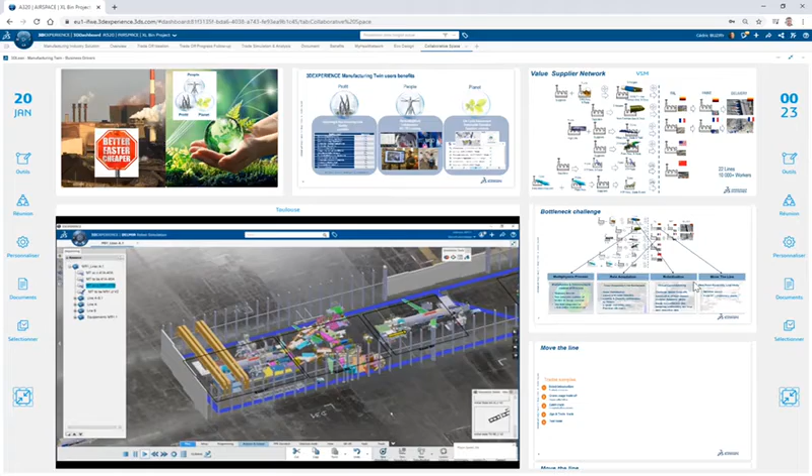Few words about the context. Our discussion with Airbus started 2 years ago when we decided to showcase a new business approach based on outcome delivery. And we started evaluating with them some concrete business challenges that they were facing on their production system. They gave us 4 topics to study.

The multi-physics test in the context of the manufacturing process, the rate adaptation of a final assembly line, the way to introduce a new robot on the line, and the move the line challenge that consists in a replication of an existing line in Germany and to take it from Germany to Toulouse. So for my presentation today, I'm going to focus on this mission, the move the line.

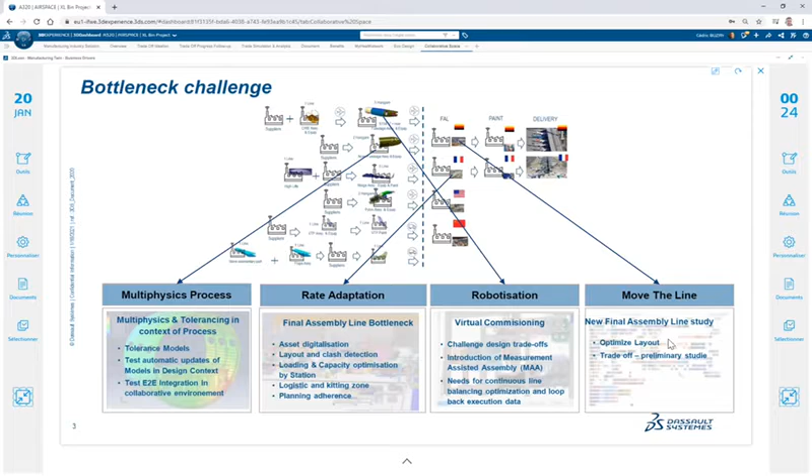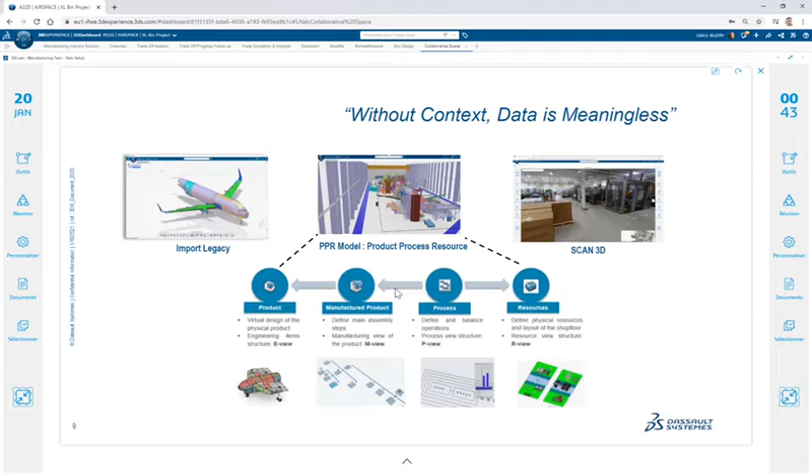Each time we start a new mission in a new plant, we have industrialized with our partner Simpa a methodology to quickly prepare all the data we need to feed the 3D Experience platform and the 3D Experience Manufacturing Twin. So we call it the data retrieval phase, and it consists of setting up all the minimum viable data you need using the PPR, Product Process Resources concept from Delmia.

We also at the same time perform a 3D scan of the factory. It's an easy way to access quickly in the platform the first digital representation of the factory. So in these setup phases, the key point is to be able in less than 1 month to have everything on the cloud ready to prepare a first what we call the setup restitution.

So we put all the data, and in parallel we run a Delmia maturity assessment with the Delmia consultant team. So at the first restitution, more or less 1 month after the kickoff of the project, you are able to present a concrete contribution of the Delmia applications and our portfolio, how to solve their problem. You base your analysis on their data.

You explain also which kind of problems you have experienced making the data retrieval and which kind of data you have been obliged to clean. It's at this moment you speak the same language and you have 100% of their attention. So it's a very important point. The first one is perform a Delmia maturity assessment and know better your customer problem.

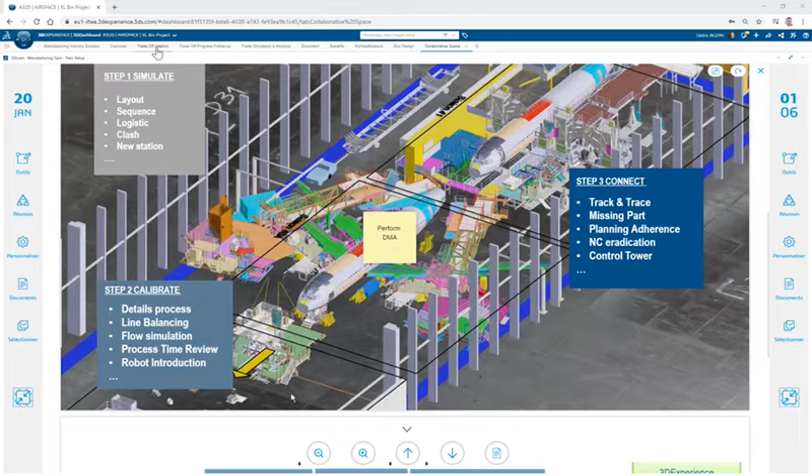To be concrete about how it works, let's switch and let's move to a 3D Experience dashboard. So here you are on the 3D Experience dashboard with the community of this particular team. And you see through an ideation pipeline here all the trades that they need to make and all the ongoing projects that they need to study in this Move the Line project.

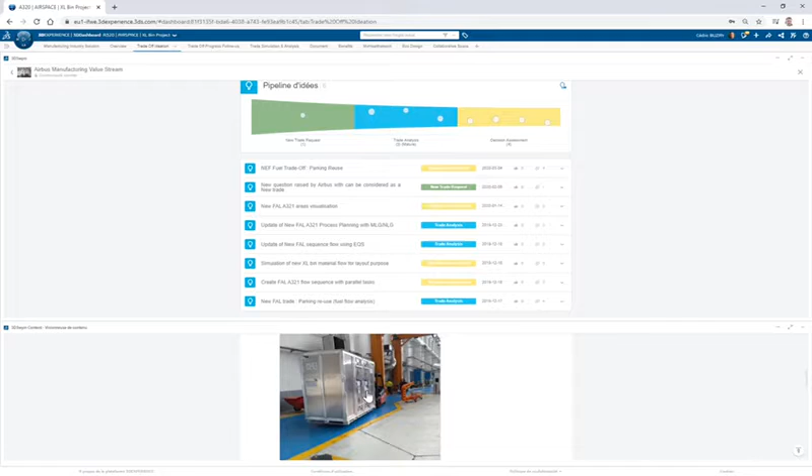And they also use the community to exchange information about a new process. They send photos, they explain their problem or what needs to be studied. All the stakeholders of the project make a regular meeting on the platform, follow all the tasks, put all the results of the analysis and the study.

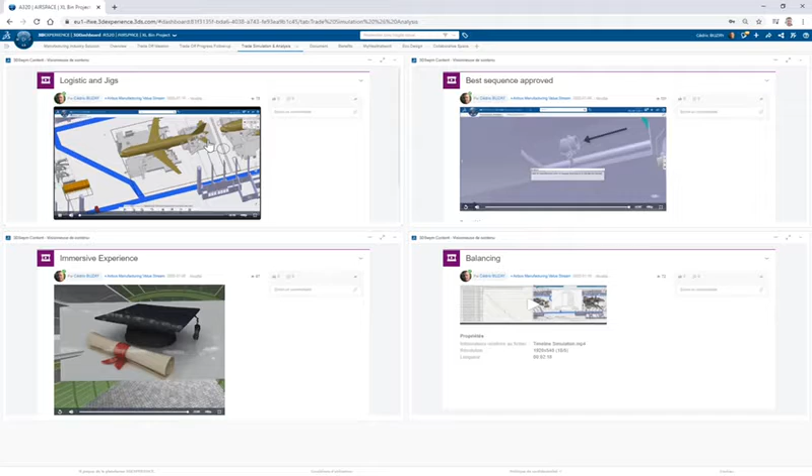And for instance, here you have a dashboard representing a restitution meeting where several teams are explaining their result. For instance, the logistic team is giving after 12 simulations the better sequence to make this logistic change near the plane.

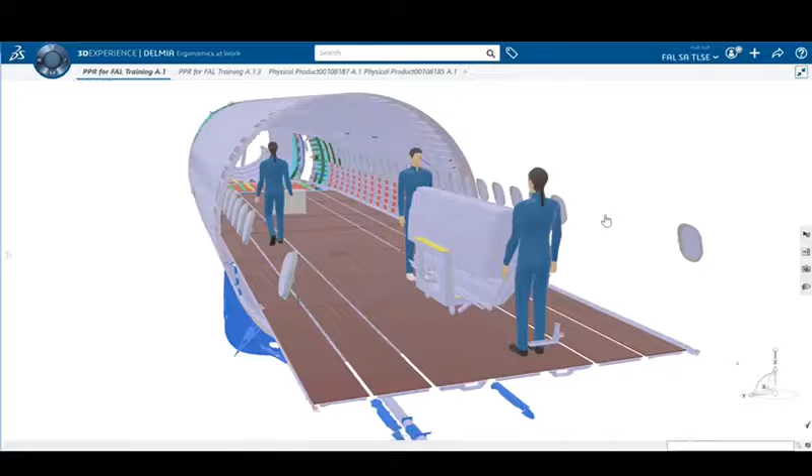Here you have the manufacturing engineering team making more simulation and reviewing completely the new sequence and the new routing, and updating also all the work instructions coming with this new routing. Then for the line balancing team, we are reviewing all the times of the routing, and we also experiment with some station team leaders the way to put the worker directly in a virtual reality mode.

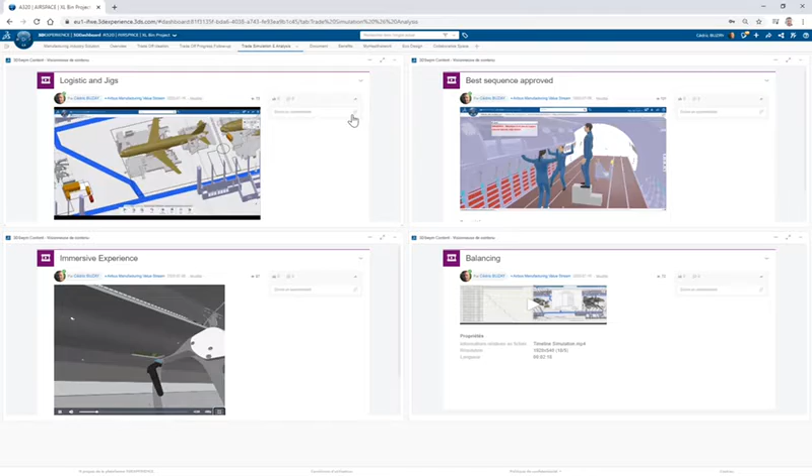Coming back to my 3D Lean board, based on the same principle as the one that you just saw in this dashboard, and based also on the industry process experience available from the aeronautics, space and defense industry, we have defined a complete service catalog with a partner.

5 levels of detail, from an industrial system to the resource, defining the kind of model we need, and also 3 levels of maturity. The first one is when you make the model and when you are able to use this model for simulation and to make some trade-offs. Then when you have a good model, you could start putting some reality, some work orders, in this model and see how this model is reacting, see if your model is a good model.

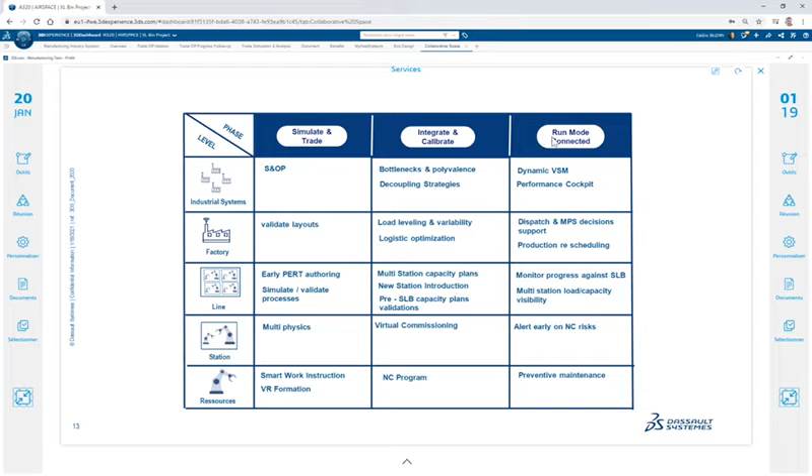It's what we call the integrated model, or the calibration that you make with the model with a new set of services. And the last level, and the one that we want to reach with the customer, is what we call the connected model. So here your virtual model is able to be connected with the reality. You have several examples of those services here, and I'm not going to enter into the detail of all of them. We could come back later.

But my main message at this point is, as soon as you start engaging within the platform on the cloud with your customer and based on the customer data, you are in a position to disrupt the way of working with them and bring real value through new services.

So the good part of the story starts now, because when the team was supporting the Move the Line project, we heard about new services for new users called MyHealth@Work that the Delmia brand was testing on a lead customer. And because of all the data we already had on the digital twin of this Move the Line project, we were able quickly to discuss musculoskeletal disorders, and we discovered that safety at work was a real challenge at Airbus.

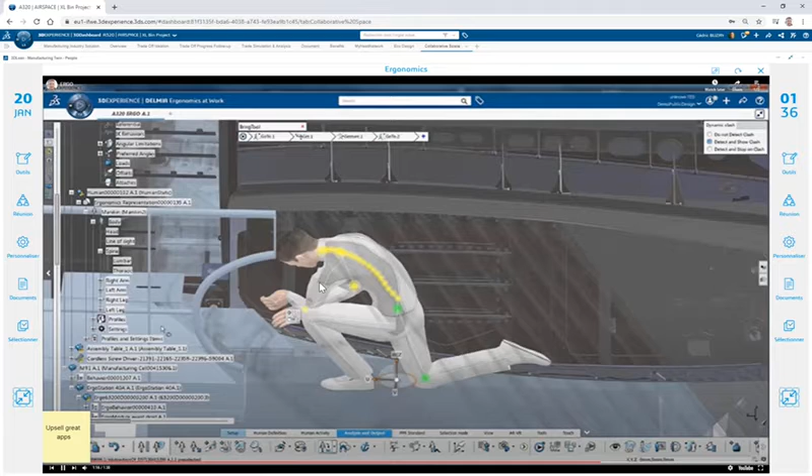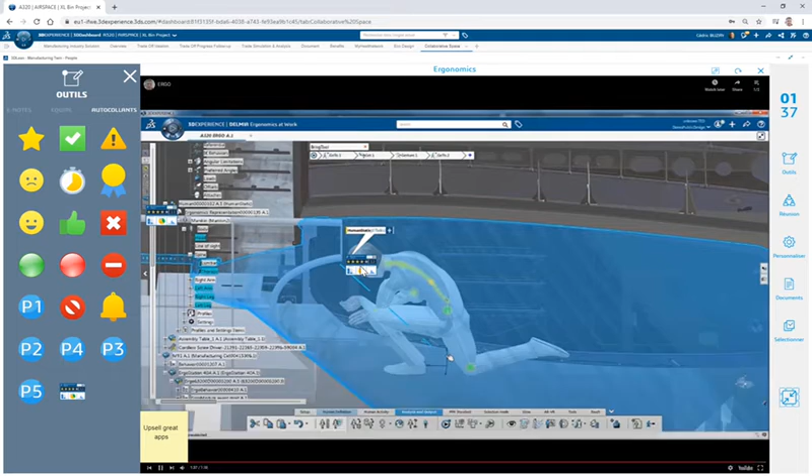So with these services and with all our data, we started to propose an MSD calculation index, something that immediately made sense for some stakeholders in Airbus, and we upsold those indexes. So a complete outcome service and a great upsell of application. And the story is not finished.

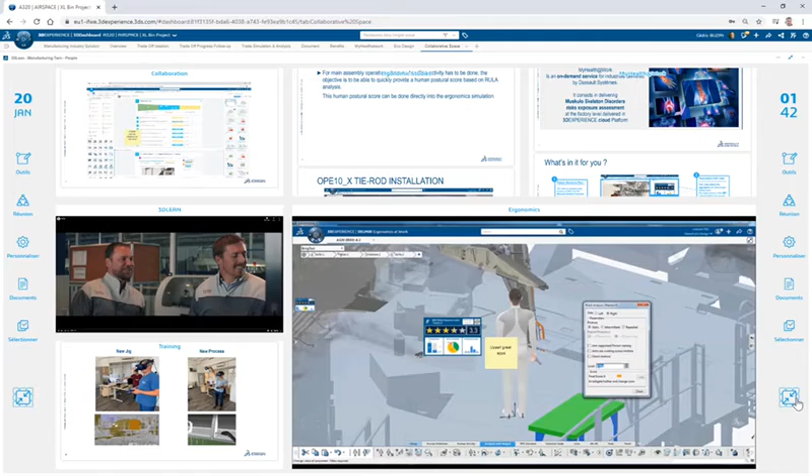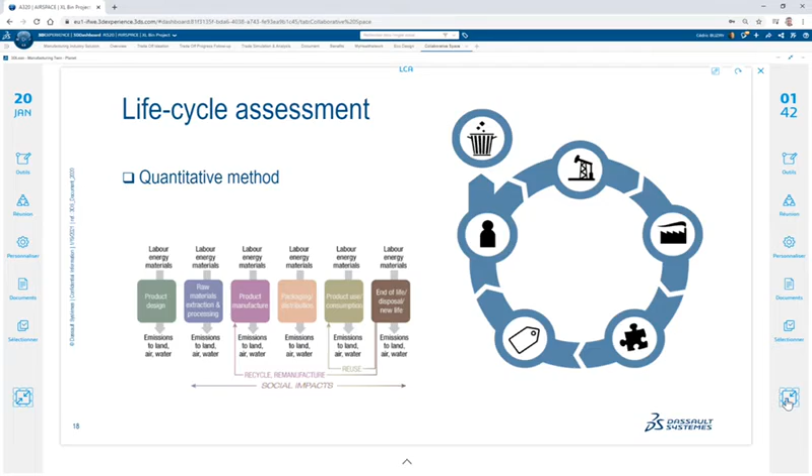In December, we were able to discuss with Airbus about a new area, the life cycle assessment. And because of all the data we have in the digital twin platform, we were able to quickly demonstrate, in this case with 2 other brands, CATIA and Exalead, how to rate a manufacturing process, in this case a composite process, and how to rate it in eco-efficient mode.

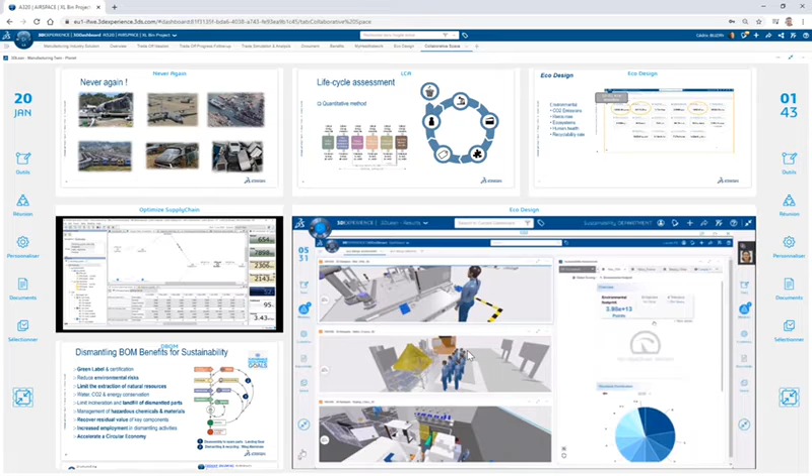So here you have an example of a process that costs 12 tons of CO2 to be produced, regarding all the parameters of this process. So this is a quick win. We made this demonstration in 2 weeks, more or less, and this demonstration has already reached the attention of the CEO of Airbus.

So as a conclusion, you see that the 3DEXPERIENCE manufacturing twin approach is a real game changer, and for me it's also a very smart way of doing business and experience relationships. It's helping our customers to better design their factory and their production system, and that's what we've done for a long time now. But it also opens a new business opportunity, helping them to offer better collaboration across the twin and put people at the center of their preoccupation. Finally, the 3DEXPERIENCE Digital Twin is also probably the best solution to support sustainable operations.

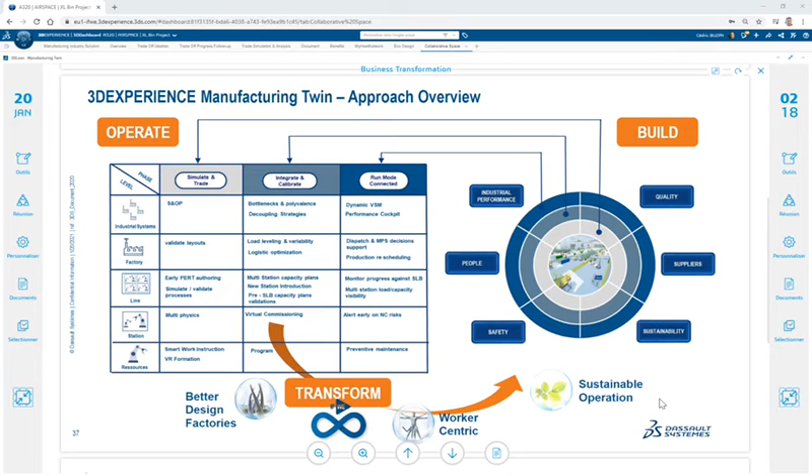So start to build your customer manufacturing twin, operate your twin with great industrial services, and use the IFWeLoop manufacturing community to sell. In 3D Lean, we never end a meeting without reviewing the action log and the next steps. So the action log and the key takeaways for me from this presentation: first, start by performing a Delmia maturity assessment; knowing your customer and the pain of your customer is very important to make business.

Second, engage as soon as you can with the platform. Now it's on the cloud, it's easy, it's quick, and it's really a good way to make business. And the last one, use the 3DEXPERIENCE Digital Twin to upsell new services. And if I review my agenda, we talked about how to pitch a 3DEXPERIENCE Manufacturing Twin. I think we covered what to sell, how to sell and how to start. The only point still missing is how much money to expect.